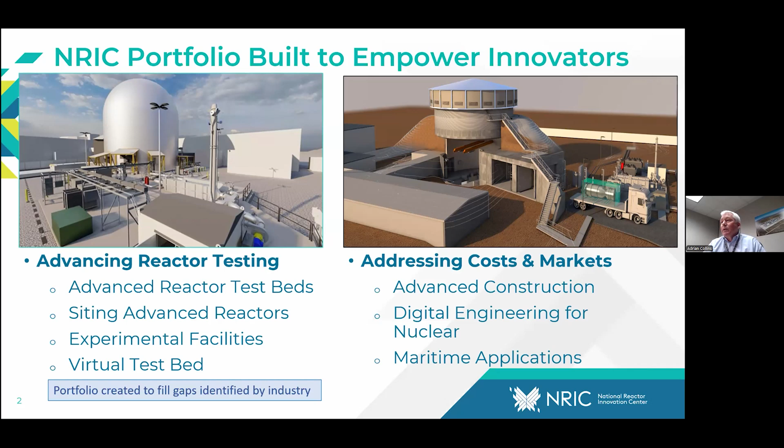In that theme, the number one highest priority activity that we have in NRIC today is the build out of what we call the NRIC Dome test bed. Dome stands for Demonstration of Microreactor Experiments, and it just happens to be the old Experimental Breeder Reactor 2 dome itself. For those aware of EBR2, it operated from the late 60s to mid 90s, about 94, so about 30 years give or take, and then it was put on standby and later D&D'd.

The dome facility itself was actually slated to come down at one point, but Idaho National Lab worked with the Department of Energy, and we ended up preserving the dome, maybe as a historical monument. At that time we didn't necessarily see NRIC and these advanced developers coming, but that's where we ended up, and it's been fantastic to refurbish that dome and reestablish it as a test bed. It doesn't run its own reactor inside anymore, but it'll hopefully be running a number of these microreactors as we go forward.

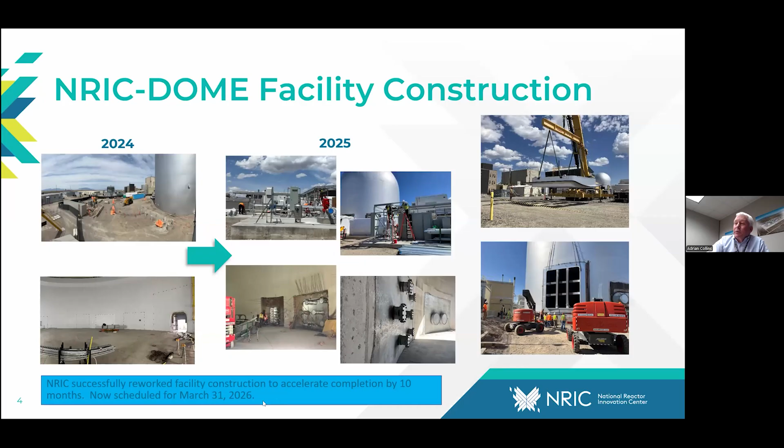We're on schedule. Things are looking just fantastic. Again, it says right here now scheduled March 31st of 2026, so we're just months away.

But when we think about the dome and testing in there, it's not just, hey, here's a facility, bring your reactor in and you can operate it and then go away. It's more of what we call an ecosystem, because there's really a front end and a back end of that, and it's very extensive.

We look at TRISO fuel manufacturing. That's what's coming into the dome. The fuel can get shipped in. We've set up storage here on the INL, not right next to the dome, but on another facility in close proximity, where fuel can come in. It can be stored prior to actually getting loaded in the reactor. Now, some developers may have that exact pathway, others may have a different pathway. So we're trying to anticipate and work with what we know to make sure those pathways exist so they can be successful.

So, for example, Radiant is the one that's actually scheduled to start coming into the dome, starting in April of this year. They'll come into the dome and operate notionally for about a year, start to finish. We're providing shielding—modular shielding that can be set up around a reactor test in there, depending on the requirements. Some developers will need that, some will not, but we'll have shielding that can go around their experiment.

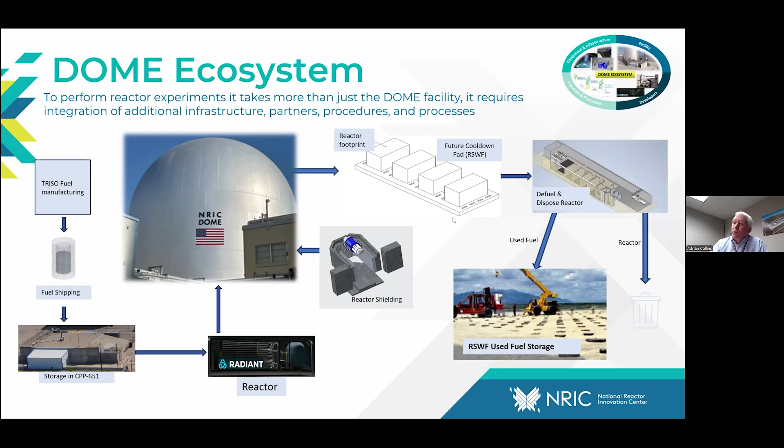I mentioned Radiant was scheduled to come into the dome. We actually went through a scheduling process last summer where we solicited from all the developers that wanted to come into the dome an application to come in, and we went through those and laid out a schedule of how the dome will be utilized. Radiant, in this case with their Kaleidos demonstration unit, is the first one scheduled to come in.

Some key dates around that: the NSDA, PDSA, DSA—these are nuke safety documents they're in the process of completing. Their KDU is scheduled right now to arrive middle of April, fuel it by the end of May, and do a criticality on that by June 18th. Again, that coincides with what many of us think about as the July 4th criticality dates that the president put in place. So that's kind of the overall schedule.

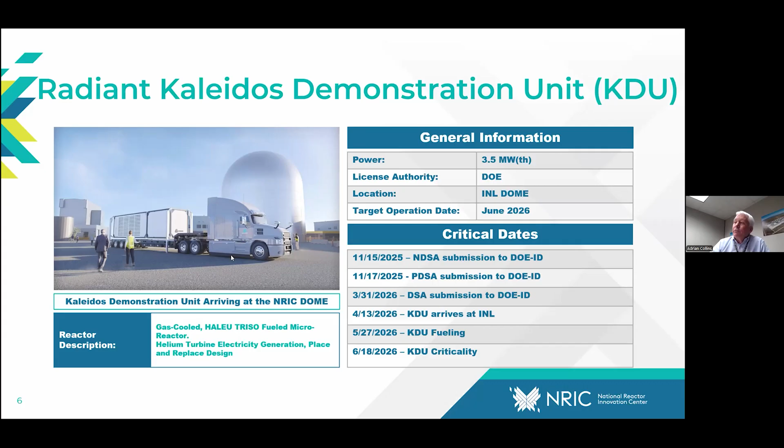And again, just kind of a rendering, but the rendering's probably not too far off of what things will look like when they start arriving.

Another one of our test beds is what we call the Laboratory for Operations and Testing in the U.S., or LOTUS.

This is actually kind of in a transition, so I hesitate to talk too deeply on where this is going, but I think it's of interest too. The LOTUS facility is essentially reestablishing capabilities within what was the old zero power physics reactor. It's in the same fenced site area as the dome, and goes back to Argonne National Laboratory days when they operated the zero power physics reactor, which has been shut down since the 90s. So we're going in and reestablishing that as another place reactor developers can come into.

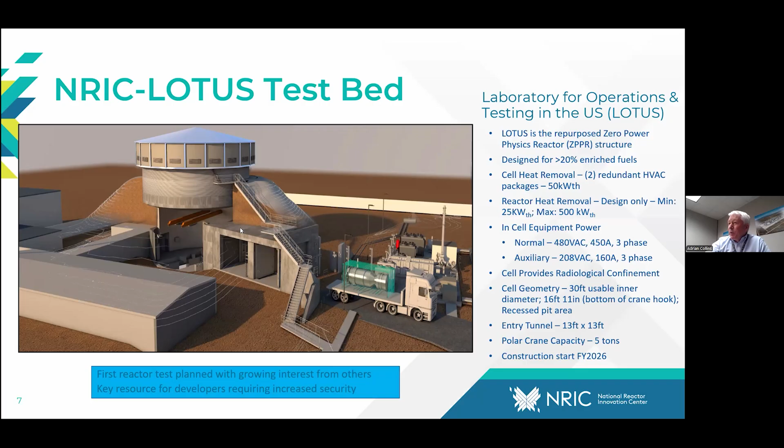So this is a rendering, again, a pretty good one. It's very close.

The LOTUS, though, is a line item construction project from Congress, and we actually went out on a construction bid for that. We moved through the critical decision process of DOE Order 413.3B, and the plan was to award a construction contract last November of 2025, with about a two-year construction period to build this out. When we got the construction bids, along with some other things, the cost increased from what was originally envisioned. We're currently working with the Department of Energy to look at an alternative: rather than reestablish this in the old Zipper facility, establish LOTUS as a new facility, which we believe we can do significantly less expensively than trying to put it into Zipper.

So we're right in the middle of that. I don't really have anything to share other than a heads up that this LOTUS, as we thought about it in Zipper, will probably move towards a new facility right next door, adjacent to it.

The first kind of experiment that wants to come in there is Southern Company, along with their partners TerraPower, Core Power, and EPRI, on the molten chloride reactor experiment. So that's what we're engaged with and aligned on to get LOTUS up and running so they can bring in that experiment and test it.

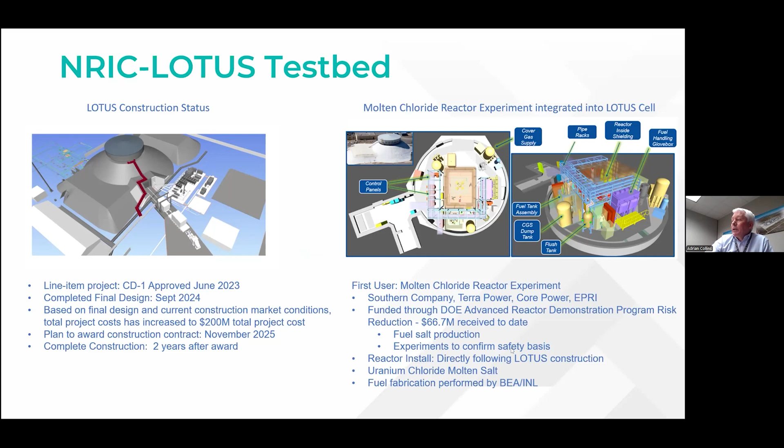Other things we do, moving away from test beds, is having some experimental infrastructure that we put in place to support developers and their R&D needs. The Helium Component Test Facility was completed in 2022. We've established some creep frames just recently, last year, in the sample preparation laboratory, another facility very close to the dome. And METL, the Mechanisms Engineering Test Lab.

This is an area where we're partnered with Argonne National Lab in Chicago, and they do sodium component testing in METL. But it's NRIC infrastructure and supported at Argonne. And then MSTEC, the Molten Salt Thermophysical Examination Capabilities - this is all molten salt testing.

This is a picture, a little old too. If I took a picture today, right above these windows there are eight manipulators - you can actually see the holes here where they would go. So this is a shielded cell with manipulators, and on the back of this is a glove box, depending on what they're working on. So this is all for molten salt experiments.

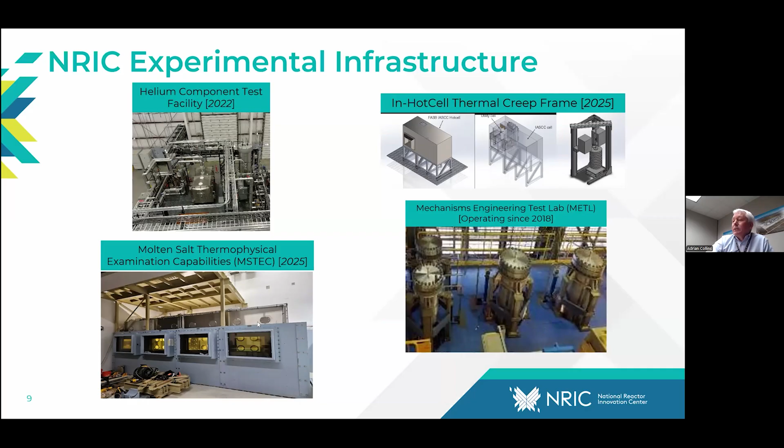Virtual test bed - I mentioned earlier that one of the other things we have is a virtual test bed, where people can come and do modeling and simulation. Maybe it's industry, maybe it's universities, et cetera. This exists - there's models in there, there's a library of information, and we get a lot of use on the VTB side of things. The thought there is how do we accelerate licensing, the DOE authorization process, and mature design before we actually start to build. So that's a virtual test bed.

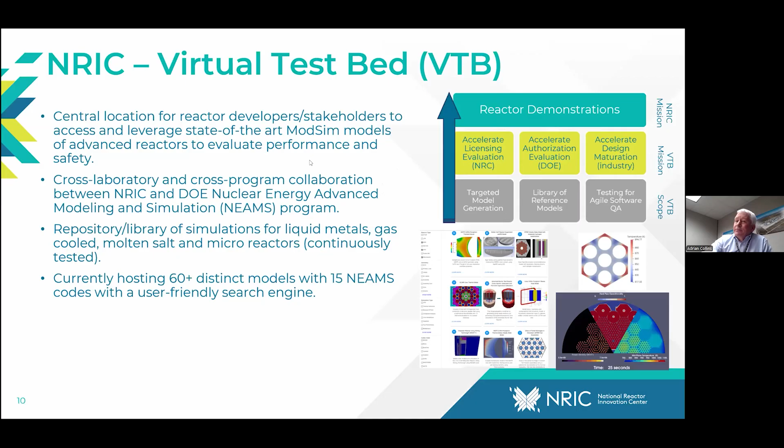Addressing costs and markets, and how do we engage there? The first thing is advanced construction technology. We actually partnered with GE Vernova on this, and the objective was to reduce costs and schedule time.

One of the things we took on very early was to come up with the diaphragm plate steel composite, which replaces forms and rebar and all the labor that goes into that. So what we did is prove out a principle where these get fabricated - this DPSC gets fabricated, brought on site, welded together, concrete gets poured within it, and it stays in place. So huge labor cost savings. We worked on that through last year, into the start of fiscal year 25 and calendar year 24, doing the testing to prove out that principle.

And it was successful, right? So when we look at some of the samples, the testing was done at Purdue.

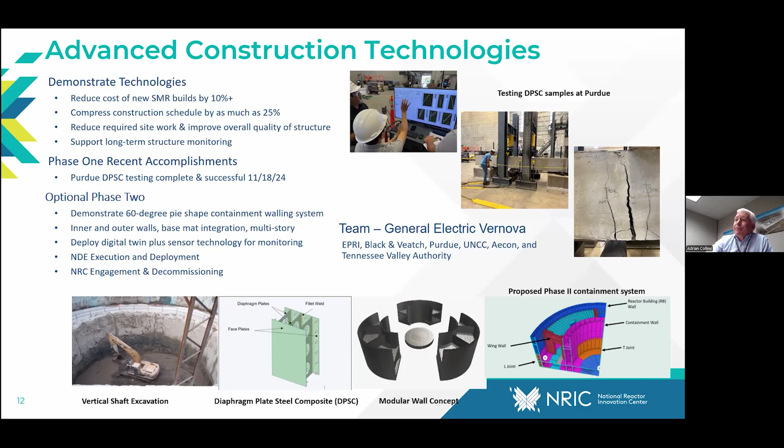Another area we went after was nuclear quality assurance challenges. A lot of costs and things were driven by NQA and NQA1. So we kicked this off with kind of a workshop that we held just over a year ago now, December of '24 in DC. And you can see a wide range of people attended this.

It was vastly attended, from developers, EPCs, suppliers, code committees, NRC, DOE, EPRI, NEI attended this, and really looking at kind of a workshop brainstorming of some areas to go after and what we could do to make sure that we were appropriately applying NQA1.

So next steps on that, we're looking at a number of things. How do we review, optimize, and modernize the requirements? Use risk-informed, performance-based approaches, integrate commercial grade dedication.

And we're doing that within like NRIC 2 and some of our construction projects, right? Where we don't necessarily have to spec NQA1, but we spec the components, bring them in, and then do a commercial grade dedication on them rather than that, and it kind of opens up our world of suppliers that we can go out to.

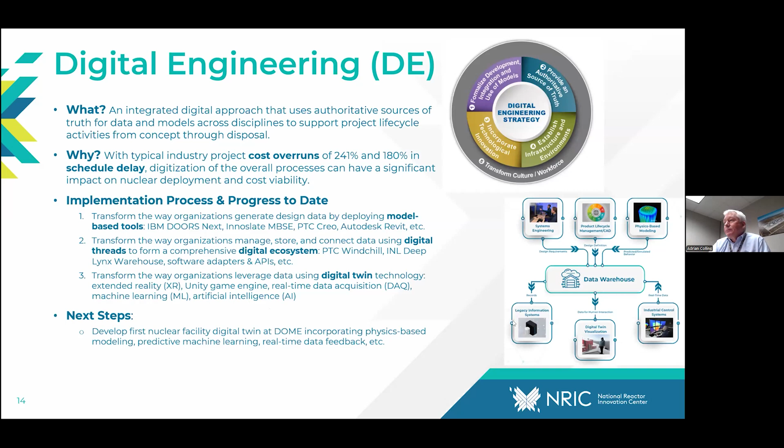And then integrating AI into the process. So a lot of time and effort into whether it's going through the DOE authorization basis or the NRC, and how AI, as it's impacting everything in our lives, can also help us in this and being more cost effective. So we're working that.

We actually put a pilot in place here just last fall, where we created a set of inputs for a high temperature gas reactor, and then had AI generate one of the safety basis documents, one of the chapters for that. And then, of course, just like all AI tools, people have to go back and review them and make sure the output's good. So we had a lot of success with that.

One of the challenges we ran into was the firewall between the government cloud and the AI tool itself, so we're working through some of that. We think in the end it's not unreasonable to anticipate we could have a 30 to 50% decrease in time to develop and review safety documents, accelerating the entire authorization process and the deployment of some of these test beds, with future application to the Nuclear Regulatory Commission too, and their reviews.

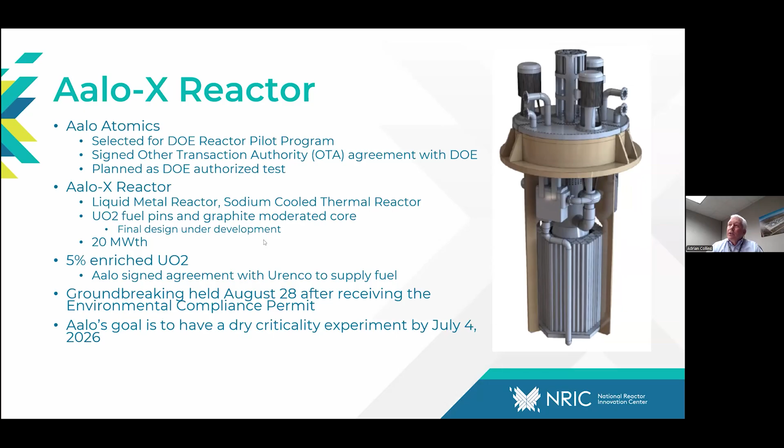So that's Aalo. The pilot program in general - most people are probably aware of that - is the Department of Energy reactor pilot program. 10 companies were awarded under that pilot program; Oklo had 2 different awards, so there's 11 total. All of those companies are going through a DOE authorization process, which is one of the things the pilot program enabled. We're engaged heavily with some, but at least somewhat with all of them at this point - there may be a few we're still finalizing contracting with, but we engage heavily. And of course, the DOE's other pilot program was the fuel line program.

That's what I have for the slides, but I'm happy to take any questions and answer what I can.

I found I have this set up for my headset, so it doesn't work if I don't have my headset on.

Thank you for that presentation. I encourage the crowd to drop questions into the chat if they have some, but I'll go ahead and kick us off with a couple questions. Just getting into the weeds a little bit, could you talk about the distinction between DOE authorized reactors and NRC licensed reactors? That's not always clear. How does the safety and oversight work for projects that go through NRIC? Can you share that?

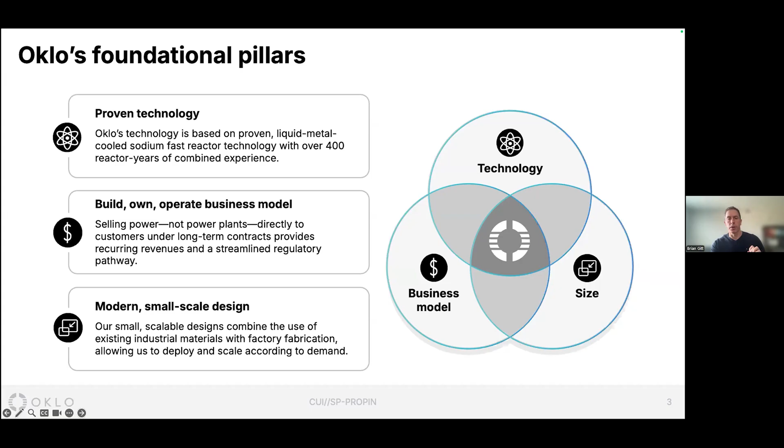As I alluded to, we started in 2013. We are relatively still a small company, only approximately 250 employees, although we are growing incredibly fast. If you go to our website and have relevant skills, we'd encourage you to apply—we have close to 100 open job positions right now. We're hiring very fast as we move into this execution phase.

The company went public in 2024. We originally raised just over $300 million and have since had follow-on additional equity raises of—this is even now out of date—multiple billions of dollars. So we are in a very strong financial position as we move into this execution phase to implement the vision that Jake and Caroline, the founders, started in 2013.

A few things we're going to talk about today—I've hit on a few of these, but I want to comprehensively highlight the rest. We're going to talk about technology and size, as I alluded to, and the benefits of leveraging this legacy technology. We'll drill into the business model a little more, and most importantly, talk about how technology, size, and the business model actually influence the economics.

What are the unit economics of how you build and operate these plants? And how do these decisions around technology, business model, and size impact what customers we can offer this to? Historically, utilities were really the only customer, whereas now we're talking about military bases like Eielson Air Force Base, data center customers, industrial sites, and smaller utilities. There's a whole new cohort of diverse customers that, because of these technology, size, and business model decisions, we're able to open up this solution for.

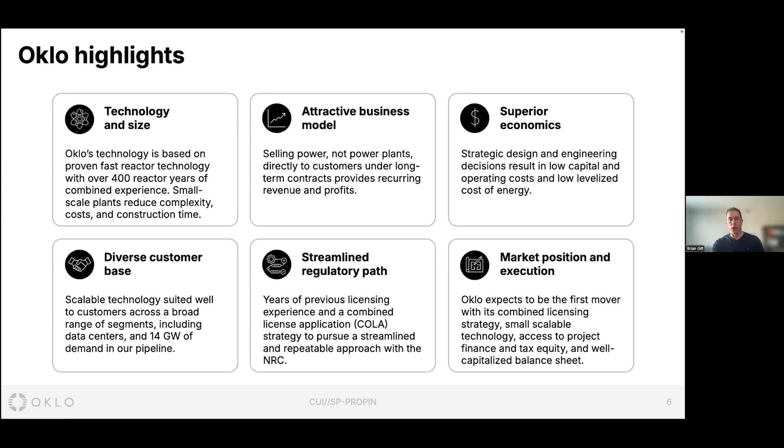So what we're actually delivering is just a small power plant. We're talking about something that can be constructed in about 18 months, or 1.5 years. We're talking about a size, in the Eielson case, of 5 megawatts electric plus the thermal steam we'll be providing, all the way up to about 75 megawatts electric. That range is the product we're offering the market right now, which is a very distinct and different product, as I alluded to earlier.

These power plants each sit on a very, very small footprint—we're talking about something as small as 4 acres. Now, this does not include a substation, parking lots, and all of that.

I'm just talking about the footprint of the power plant - the nuclear island, the balance of plant, the air-cooled condensers, and the core infrastructure required. Think of this as Lego blocks. A lot of our data center customers are looking at 500 megawatts, 1,000 megawatts, or even more. You just put these in Lego-like fashion on a site, allowing incremental build-out, because each power plant is its own independent system. There's no dependency on shared cooling water or anything like that amongst these power plants.

The design life is approximately 40 years, and we're also getting a license for our plants for 40 years. However, these licenses can get extended, just as many large plants are now going for NRC, Nuclear Regulatory Commission extensions. We can as well, and you can update, refurbish, and replace different components of the plant so it can go longer. So I just wanted to level-set: what we call a powerhouse, or Aurora powerhouse, is just a small power plant that is independent in nature and can be scaled in Lego-like fashion on a site.

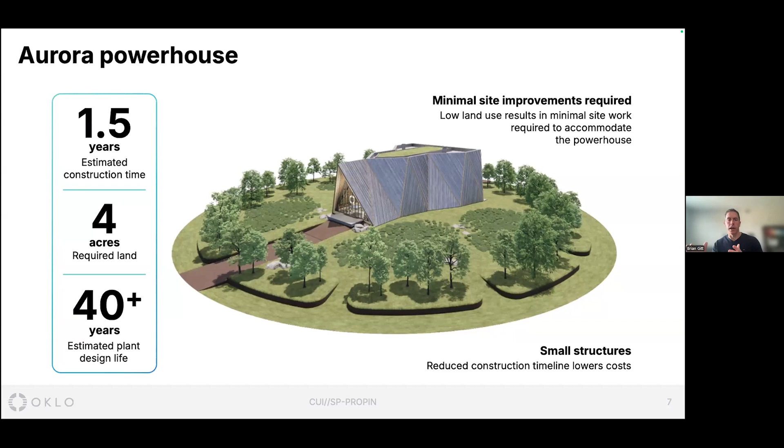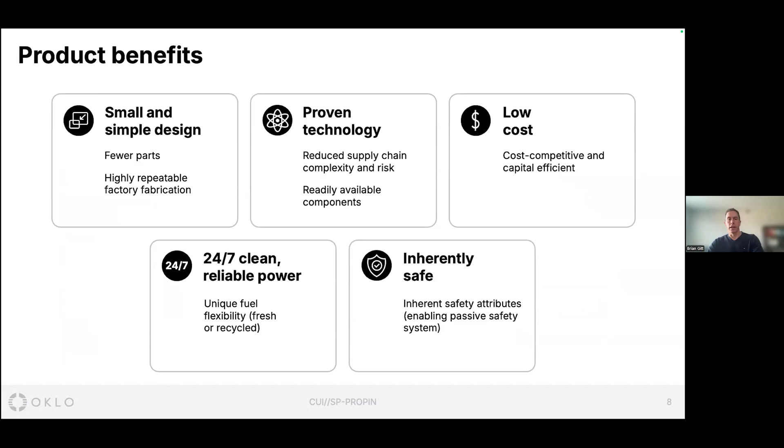The product benefits of this - we hit on the simple and small design. Simplicity, we all know this is just common sense, but the more simplistic a design, the more cost effective it's going to be. Anytime you add a lot of complexity and detailed engineered systems with layers and layers of redundancy, you're going to inflate costs. Having a really elegant design that's simplistic, with fewer moving parts and fewer things to go wrong, is a huge advantage from a cost standpoint and a maintenance and operation standpoint.

We wanted to select proven technology. A metal-cooled fast reactor was developed in the early 1950s. As I mentioned before, there's over 400 reactor-years of operational history running these around the world. About 25 of them have been constructed, and there's some in operation today in Russia and in China, and soon to be in the US as we start commercializing and deploying these.

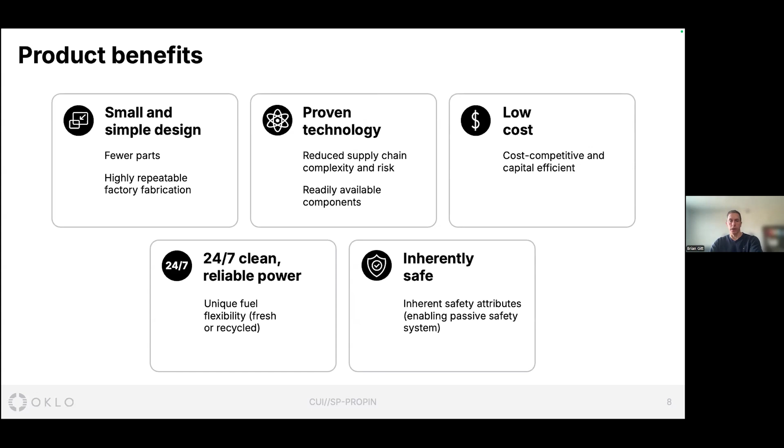Cost is really essential, and we're going to talk a lot about how we get to economies of scale through volume versus size. Looking for cost engineering opportunities to stay competitive is incredibly important. Ultimately, providing this 24/7 clean baseload product - as we talk about other energy sources that are more intermittent or less reliable, this is really solving for that problem, which in a military base like Eielson is essential: reliable, resilient, and affordable baseload power. And we have to have the safety - all of these inherent safety characteristics that we're going to talk about are really, really key. So all of these are the inherent benefits.

So when we're talking about Oklo's powerhouse, a lot of people think about the reactor. Now, the reactor is just one component of the power plant. It's an important component, but at the end of the day, all it is a heat source - it's just a fancy way to boil water and create steam, although a very important part of the system.

When we're talking about Oklo's fast fission reactors, imagine just a large stainless steel tank - non-pressurized tanks. These are not forged, this is rolled steel, 304 stainless steel, very similar to tanks made in petrochemical and pharmaceutical industries. There's nothing exotic, basically existing supply chain, non-exotic materials. That's really important - as I mentioned, we can build a range of sizes, in the Eielson case from 5 megawatts all the way up to 75 megawatts. The size of the vessel can change, but ultimately we're trying to standardize as much as possible.

You can ramp power up and down based on other factors like the flow rate of the coolant and how much heat you're pulling off of this, so there's a range of power output that's possible. We operate at atmospheric pressure, so these are non-pressurized vessels, which helps on a number of factors. Number one, safety - if there were to be any kind of event or problem, you don't have any driving forces because it's a non-pressurized vessel.

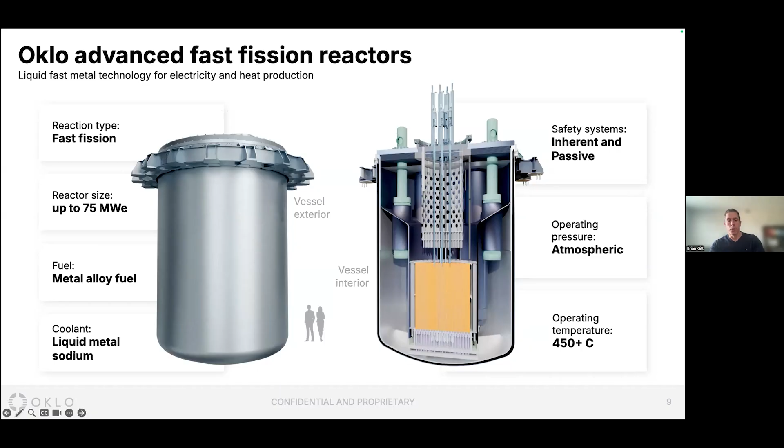Again, it's about simplicity in the design, fewer things that could potentially go wrong if it's at atmospheric pressure. We operate at 450 degrees C, which gives high thermal efficiency compared to traditional light water reactor units that operate at lower temperatures. So those are some characteristics of the reactor itself.

But the reactor is just a part of a more comprehensive system. It isn't overly complex. We have the reactor vessel, which is the heat source where nuclear fission happens. That whole reactor vessel is full of liquid metal. Imagine a big stainless steel tank, with fuel at the bottom, and the whole tank full of liquid metal. As that fuel heats up from fission, it transfers heat to the liquid metal, which we pump up through heat exchangers. At the end of the day, it's like a big fancy tea kettle.

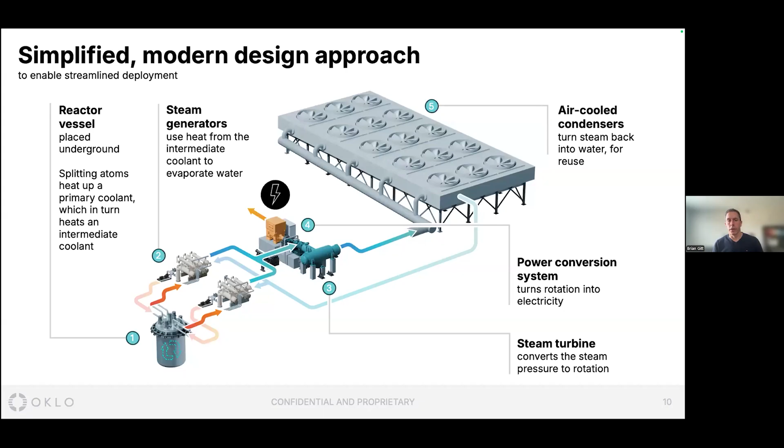You're just trying to boil water to create steam. So you have a series of heat exchangers that transfer heat from the liquid metal to water, boiling it to create steam, which ultimately turns a turbine. At the end of that, you have heat you need to condense back, so we use air-cooled condensers. This is really important because we don't need to be near water—no ocean, lake, or reservoir—so it opens up siting possibilities tremendously, using an air-cooled mechanism to deal with that decay and excess heat out of the system. Those are the basic components of Oklo's design.

One of the other benefits of smaller reactor sizes is it's much easier to reach the level of reliability and resilience required by a military base, a data center, or even a small utility. Imagine a large 1,000 megawatt reactor—those get refueled every 18 to 24 months. What happens when you take it down for refueling? Where do you replace all that power? With a much smaller unit, it's easier to get redundancy and backup, so in certain applications you can have multiple powerhouses on-site. Anytime you're taking one down for refueling or maintenance, you have spare capacity to fill the gap. That enables us to reach greater than 99% reliability, which is often required by defense and data center applications.

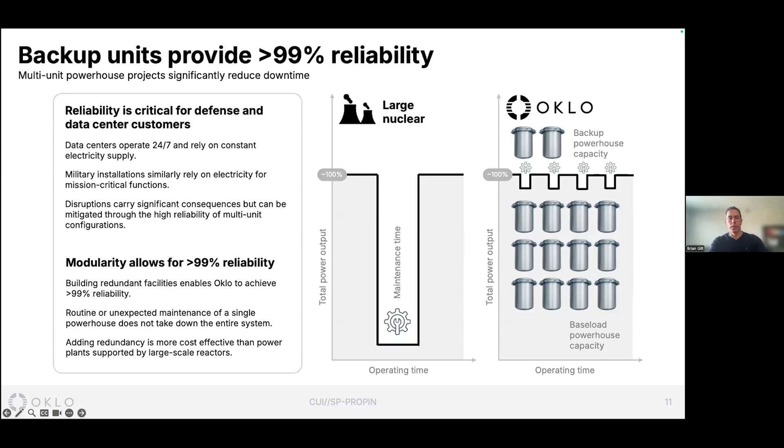When we talk about nuclear energy, it's really the cleanest and most environmentally superior form of energy we know how to make as humans. It beats out wind and solar on land use and materials intensity, and it even beats wind and solar on greenhouse gas emissions. When we think about environmental impact, the most important things to keep in mind are land, water, and waste. Across these dimensions, nuclear is superior because it has the smallest materials intensity—it uses the smallest amount of land, the smallest amount of materials, and therefore creates the smallest amount of waste.

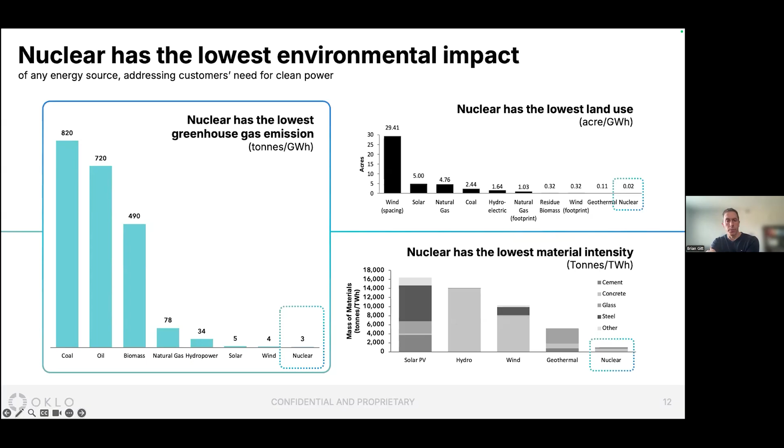And we'll talk more about the waste and any objections to that in a few minutes. But from an environmental lens, it's certainly the most superior way to generate energy that we've figured out so far.

Let's dig into regulatory. Oklo has been formally engaged with the Nuclear Regulatory Commission since 2016, and we've been putting in lots of iterative reps and negotiations with them over all this time. And finally, the light is at the end of the tunnel.

We are very confident based upon, at this point, over 600 technical and planning meetings. This is basically our engineers sitting down with their engineers and hashing out all of these negotiated details around workforce, operator requirements, security, environmental review, and all of these different aspects. And we've submitted nearly 60 topical reports, which are basically white papers on each of these different topics.

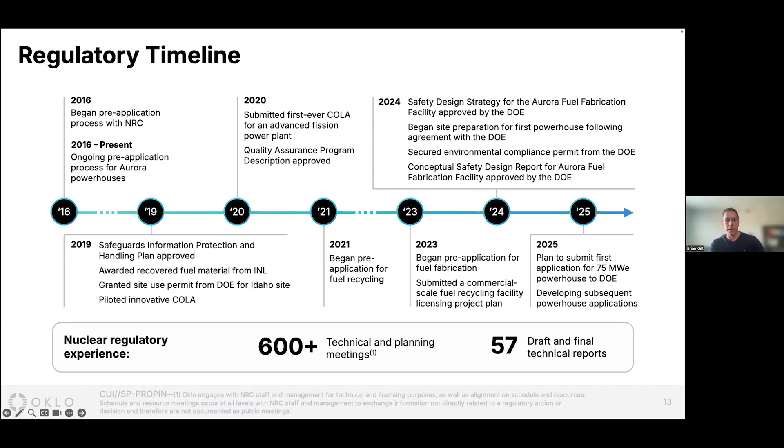So we've made tremendous headway and traction in this arena, and we're incredibly well positioned and confident of navigating this and having a scalable path forward.

So much so that we've already started to break ground in construction on our first plant in Idaho. In September, we broke ground, and as of right now, Kiewit, who is the lead constructor on that project, is basically blasting basalt. There's a bunch of basalt rock that needs to be removed from where we're going to place the power plant, so we can bore down for where the reactor vessel is going to sit. That is happening as we speak. Right now, Kiewit is on site, blasting, doing site prep, and getting that construction process going. So there's a lot of activity and headway on that.

And all of this leads into: even if you can get the thing licensed and you can start building it, if you don't have a fuel supply strategy, you can't turn that on. To be quite frank, that has been the number one gating factor for advanced nuclear and SMRs in general, is having access to fuel supply.

Oklo has a three-pronged strategy on this. First is government supplied fuel. The US government is sitting on very large stockpiles of material, as evidenced by our first plant that we're building in Idaho, which is leveraging the same fuel that was in EBR2, that experimental breeder reactor 2 that ran from 1964 to 1994. We are taking that fuel and recycling it for use in this first powerhouse that we're deploying.

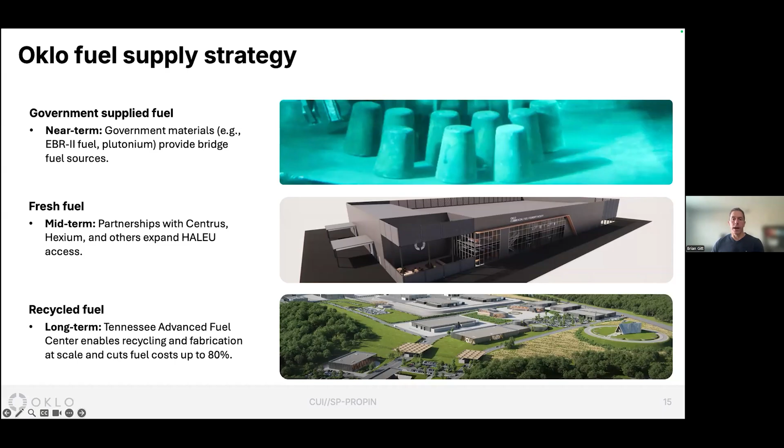So this gives us three options for fuel sources. The government fuel is going to enable the bridge, right? That's going to enable us to scale faster, because that material all it has to be is down blended. You don't have to do this very complicated manufacturing process, you're just down blending it and mixing it with uranium, fabricating it into fuel, and you can load it into our advanced reactors. Fresh fuel is incredibly important because we've got to stand up the supply chain, and then the longer term strategy is recycled fuel. So all of that is underway and will meet different short, mid, and long-term needs.

As I mentioned earlier, the business model is really, really important, especially as we talk about smaller utilities or military bases or data centers, because they are not going to want to come up with the upfront capital. So selling power, not power plants, is really foundational to coming up with a very fast to market approach that meets customers where they're at and solves the problem we can actually solve for them. And we're doing that through long-term power purchase agreements.

I'll talk about the Eielson project in a second, but typically those agreements are 20 years. So the customer is basically saying, hey, we're going to buy X amount of power over a 20-year period of time at this cost and agreed upon price. And that is kind of how we're commercially constructing it.

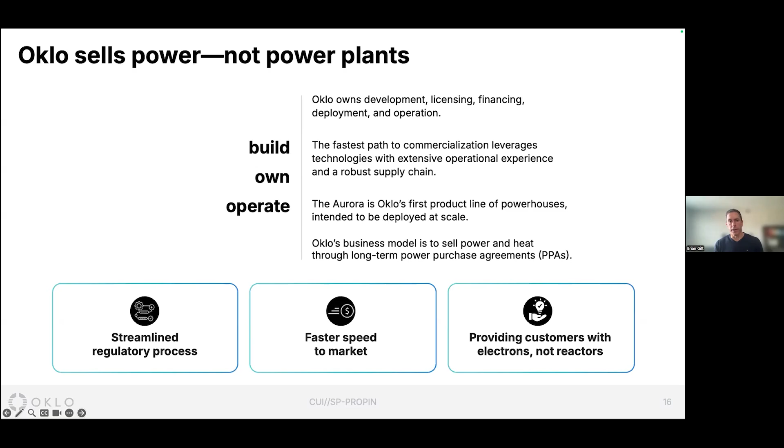Then we take that agreement and we go to the capital markets and we finance against that to get the power plant built, through a combination of debt and equity. And we're able to leverage investment tax credits from the federal government — in some cases, up to 50% of the cost can come back in an investment tax credit. We're also working with the Energy Dominance Financing Program of DOE, which would enable us to access low cost of capital in terms of the financing rate. And all of this gets into our ability to sell affordable, low-cost power.

I mentioned the vertical integration of what Oklo is doing versus traditional approaches, and I think this slide illustrates that well. Whereas in the past, a reactor designer would just license their design to a utility, and then the utility would go and build and operate and get a license to operate that plant, by vertically integrating, we can streamline this process.

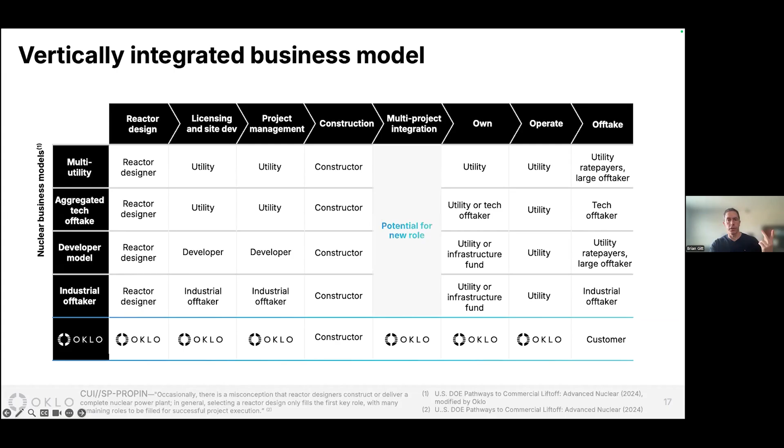We still are working with constructors, so we're working with Kiewit in Idaho and Haskell in Alaska for the Eielson project. But ultimately, we're taking over many of the roles that the utility traditionally had done. This really enables us to streamline our approach for a regulatory process — we can go through in one step versus historically that has been two steps — and just have a much more efficient process going forward.

We've built a very large pipeline of opportunities, both working with the Department of Defense as well as Meta and Switch and other data center operators. We don't need to talk much about this today, but this pipeline is almost growing by the week, and it's just incredible the amount of demand that there is for this product right now.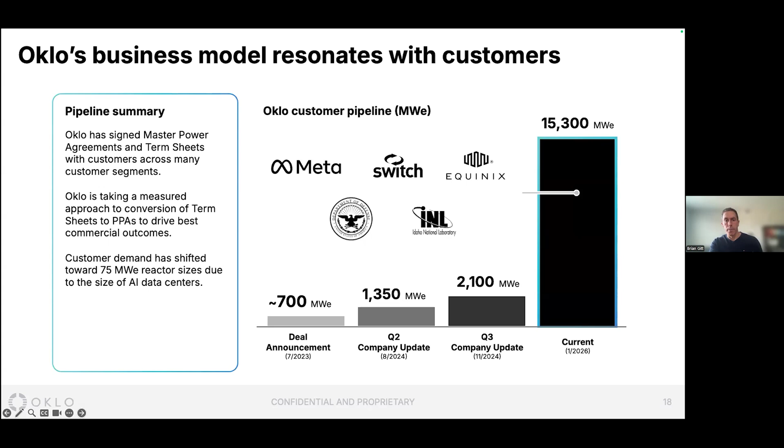So let's talk about an update on Eielson and what it is and where we're at in the project. First and foremost, the whole purpose, the mission of this, is to provide a very resilient on-site energy solution for Eielson Air Force Base. The base cannot fulfill its mission unless it has reliable, affordable, resilient energy, so energy security and having this long duration islanded operation option is really critical to fulfill that mission.

So our scope for this is all full stack: design, license, finance, construct, own, operate, maintain, and ultimately at the end of life, decommission. All of that is within Oklo's scope for the project.

This project, the way it's currently scoped, is a small amount of electric power, 5 megawatt electric base load. There's also a thermal component for district heating for the base, the 400 to 500,000 pounds per hour of steam that would help with that use case.

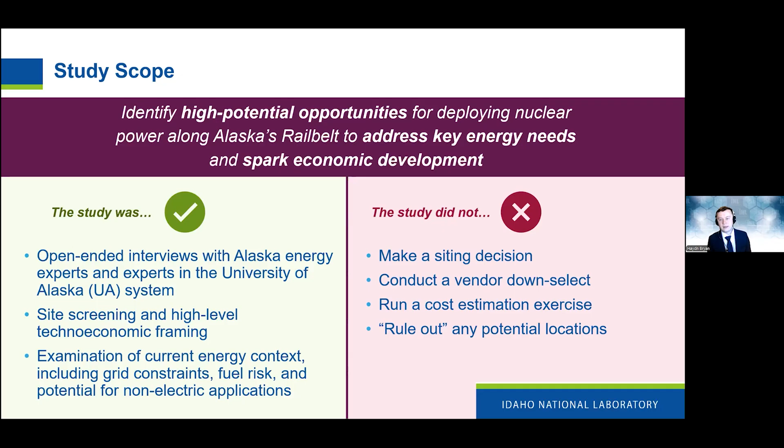What we did, though, is what you see at the top here: identify high potential opportunities, specific locations that stood out as likely first adopters for advanced nuclear technologies in the Railbelt that would help address key energy needs and spark economic development in the region.

So first off, the high-level findings that we applied to these high potential opportunity sites, based directly off of the interviews that we conducted. The region faces transmission challenges and generation backup constraints.

The rail belt can be best thought of as an interconnected network of microgrids, and there are limited backup generation within the region. So any amount of stable, reliable baseload generation is worth its weight in gold in the area.

That's doubled by the looming natural gas insecurity in the Cook Inlet. The cost of recovering natural gas from the Cook Inlet is increasing as the resources in the inlet decrease, and there have been challenges with suppliers moving out or potentially not continuing their contracts in the region.

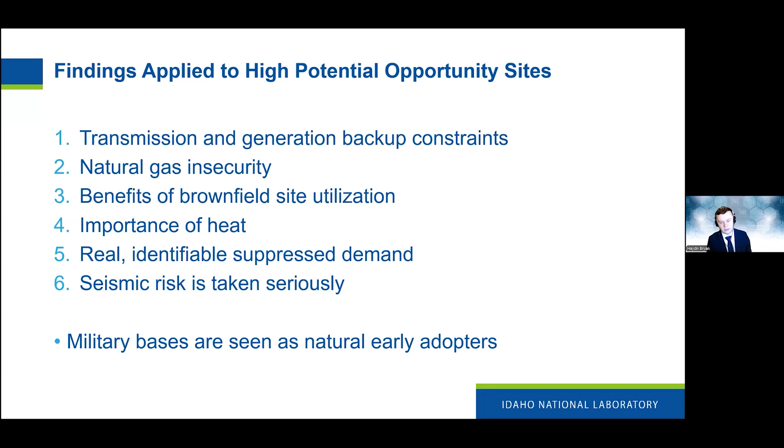Finally, since we were looking at commercial applications of nuclear, not military, there are military bases like Eielson that are seen as natural early adopters. They already have staff members, an extreme reliability need, and they don't like having a constant need for refueling. So they're a very natural early adopter for nuclear, and as discussed previously, they're already looking at doing so.

Again, kind of preaching to the choir here - these are things that are already known, but there are transmission and generation constraints in the rail belt. There's a $400 million project with $200 million of cost share from DOE aiming to increase transmission from about 80 megawatts constraint to 250 megawatts. And any new generation capacity added creates momentum for new transmission infrastructure.

A little bit more on the natural gas shortages. Railbelt utilities remain dependent on natural gas extracted from the increasingly marginal and cost-intensive reservoirs in Cook Inlet. The two main alternatives being discussed to resolve this issue are either import from elsewhere in the region or from other countries, or a pipeline from the North Slope. Both of these are options, but they introduce costs, complexity, regulatory complexity, and significant lead times.

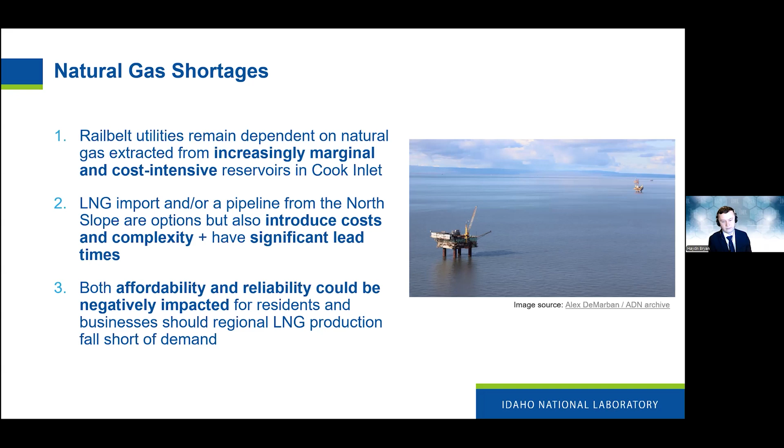The challenges are already looming. Both affordability and reliability could, and perhaps already are, being negatively impacted for both residents and businesses should regional natural gas production fall short of demand.

So now we can move into the alignment of the Railbelt requirements and some of the benefits of advanced nuclear capabilities. Some of these were already covered in previous presentations, and this is kind of what the entire conference is about, so some I can move through quickly, but I think it's an important point for us to touch on.

So the matched capacity between what the Railbelt needs and advanced nuclear. Traditional scale nuclear power plants are in the hundreds of megawatts up to gigawatts, whereas advanced reactors, small modular reactors, microreactors are as few as 1 megawatt up to tens of megawatts, or the small hundreds of megawatts. That's really the size needed by the Railbelt, and the transmission capacity of the Railbelt as well. That also allows you to build your generation capacity incrementally as your load evolves and not take on too much financial risk.

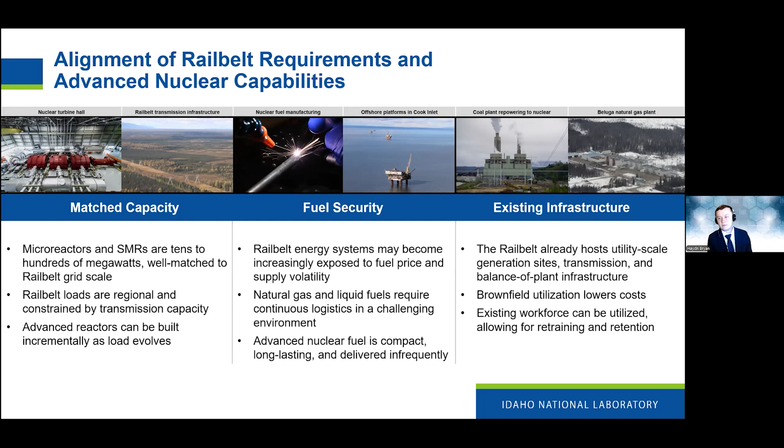The fuel security as well - you're moving away from something with diesel or natural gas that needs a constant supply chain and constant refueling to something that is refueled on the order of years as opposed to constant. Again, as I mentioned, the existing infrastructure, you can potentially reduce your costs by up to 10 to 35% if you utilize existing infrastructure. This picture on the left is the Kemmerer plant in Wyoming, a coal-to-nuclear power transition they're looking at. And on the right, you can see the Beluga natural gas plant, which is actually one of the sites selected in our study.

There's suppressed demand. Mining is a large suppressed demand that ends up showing up. There are energy intensive economic activities that are constrained by energy cost and availability. It represents demand that's operating below its economic potential, not speculative growth.

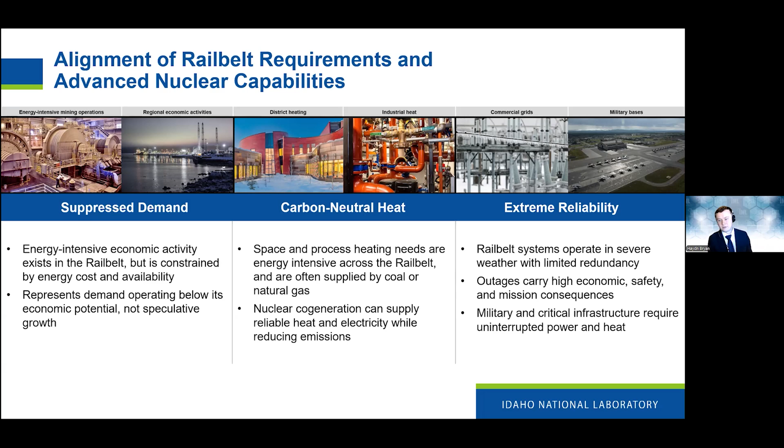This carbon neutral heat, there's district heating in the region, and that could be expanded. Nuclear cogeneration can supply reliable heat and electricity while reducing emissions. Nuclear is a very reliable technology, and that's a very beneficial capability to have in Alaska. This also matches very well with military or critical infrastructure, which require uninterrupted power and heat.

So the study candidate sites, presented in no particular order, came out of our conversations with experts in the area. The Aurora coal power plant, which is 27.5 megawatts electric, has a district heating site that provides heat to around 200 customers. Customers doesn't mean people, that means buildings. And that turns nuclear heat into a primary product, not a byproduct.

And it has very winter peaky load, and also air quality pressure makes coal replacement very politically legible. It's the cleanest example of a brownfield transition as opposed to a pure power swap.

Beluga is a central Railbelt node where firm capacity has system-wide reliability value, and existing generation in the substation context favors drop-in nuclear replacement logic. The construction, given Beluga's location, is going to be a little bit harder than average if that site is considered, but the operational value is unusually high there, given that it's a brownfield site and it's not being used. It's a mothballed site, 281 megawatts potentially there.

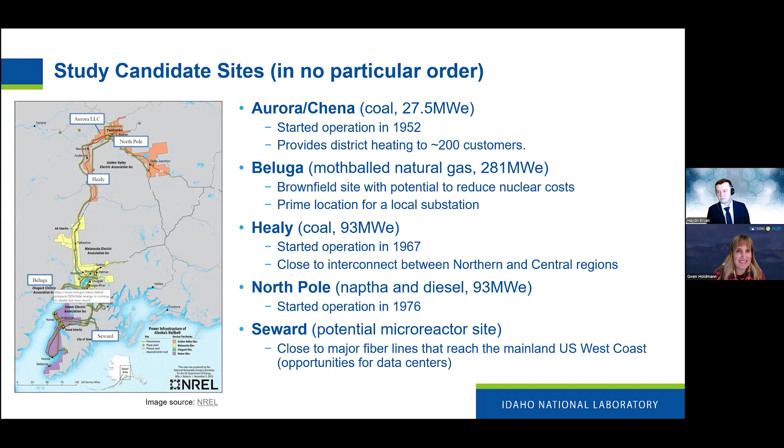Okay, yeah, great, thank you. I have about 10 other questions for you, but I'm going to hold them. I have about 10 other answers.

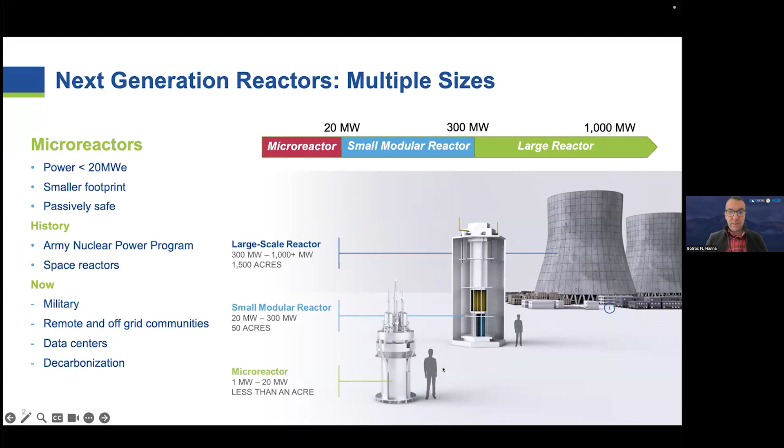Nuclear microreactors are not a new idea. They have been used in the Army nuclear power program and also for space reactors. Right now people are interested again in microreactors, also for military applications, remote communities, microgrids, data centers, and so on. You can see how microreactors look compared to a human, and how this is different from small or larger reactors.

The benefits of microreactors, why they are attractive in general, is because they have a small size and should be easier to transport, especially to remote places and military bases. The design is simple and made to be fail-safe. Also, it can be built and connected relatively fast, within a few years.

So it should be built faster than larger reactors. Also, it is designed to be more and more autonomous. It can be located with the end user, and it's a fast way to learn from real world operational data - you can build the reactor relatively fast and get a lot of operational experience compared to larger reactors. And also, as many people talked about before, it's flexible to site because it can be transported.

The challenges of microreactors: the first one is this economy of scale. So for microreactors in general, the cost per kilowatt or megawatt hour is relatively high compared to larger reactors. The second challenge is fuel availability - many microreactor vendors right now are interested in different fuels compared to those used in large reactors.

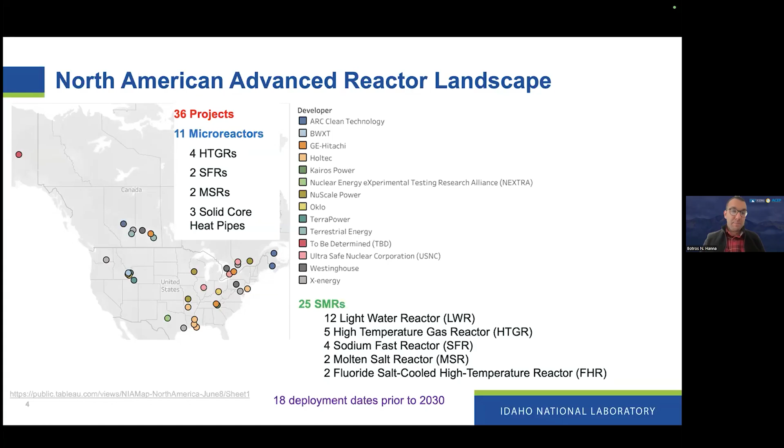Again, just showing there is a lot of excitement about microreactors. You can see there are right now 36 projects of nuclear reactors in North America, 11 of them are microreactors. And when you talk about microreactors, you have all kinds of microreactors and several designs and technologies, and 18 of these projects are expected to be deployed by 2030.

Now I'll focus more on the economics. Just to give an idea what we mean by economy of scale, here I'm showing the overnight cost of a microreactor and the operational and maintenance cost of a microreactor, and you can see how the cost gets really higher for a small reactor.

Just to give an example, if you have a large reactor like 1,000 megawatt, you can reach an overnight cost as low as $6,000 per kilowatt. But if you're talking about a microreactor that's 1 megawatt, this overnight cost can be up to $18,000. Same for the operational and maintenance cost - for large reactors in general it can be as low as $20 per megawatt hour, but for smaller reactors it can be as high as 160, 180 dollars per megawatt hour. Of course these numbers will differ from one design to another.

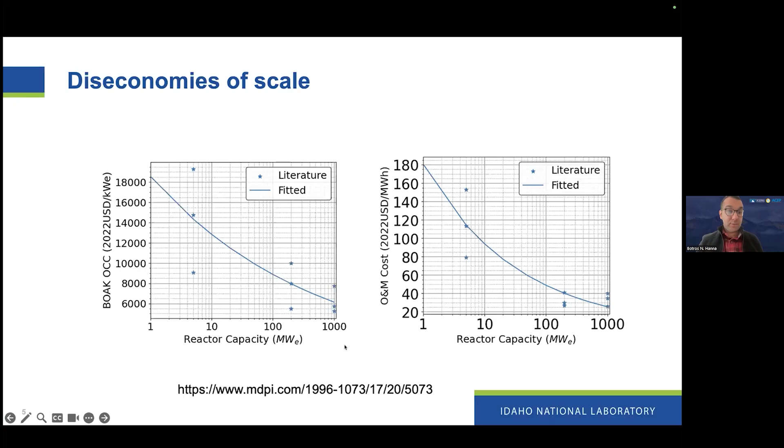This is just a plot showing numbers from different designs in the literature, just to give an idea about the diseconomy of scale.

So, how to estimate the cost of nuclear microreactors? There are already a lot of cost estimates of microreactors around, but we thought it's important to develop a bottom-up cost estimate for microreactors as detailed as possible, looking at designs that the industry is interested in, designs that use TRISO fuel. We also had the opportunity that in INL we have the Marvel project, a microreactor project, and we got some cost data from that project. This helps us come up with a relatively realistic cost estimate of microreactors.

If you are interested in the methodology in detail, how we came up with such a cost estimate for several microreactors, you can scan the QR code for the published report. You can also scan another QR code for a tool for cost estimation. This tool right now is a Python code, so we are working on a web-based app that can be used by more and more users.

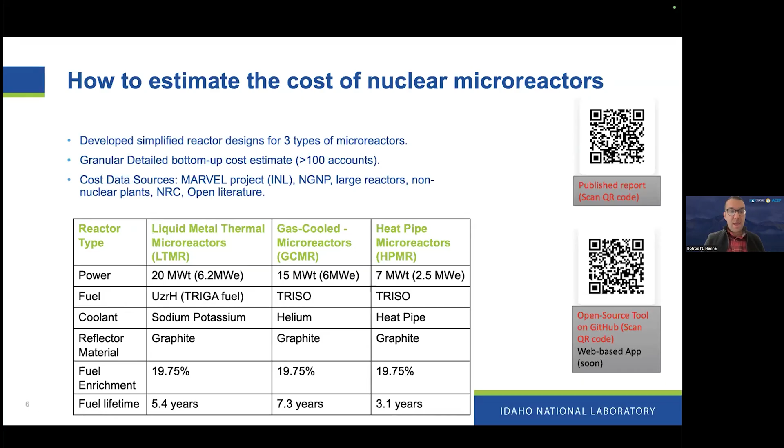The power range here is between 7 megawatt thermal and 20 megawatt thermal. The coolant is sodium potassium for the liquid metal, helium for the gas-cooled reactor, and heat pipe for the heat pipe microreactors. All of them have a relatively high enrichment, almost 20%, and they have several lifetime options for the fuel.

It's important to make some caveats here. The first is that before I show the cost estimate for the reactors, it's important to emphasize that economics are not the only factor in making decisions about using or investing in a specific microreactor. There are several factors that we considered, like capacity factor, safety, operational experience, supply chain, thermal efficiency, and so on. So economics are one factor to consider, not the whole story.

Also, the three designs that we considered here are just examples. There are a lot of variations of design of microreactors, and these designs are pre-conceptual. The reactor designs were not fully optimized, and the cost estimates were developed with incomplete information. So we made some assumptions to come up with these cost estimates, and these numbers should not be used for investment decisions.

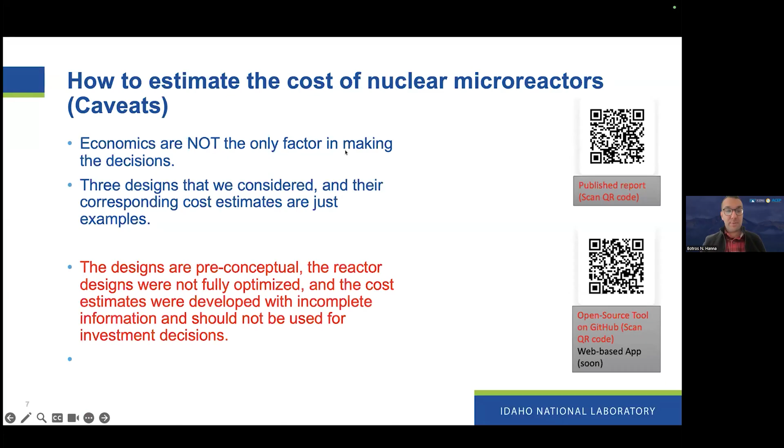All the numbers that I'm showing here are in 2024 USD. The cost includes the cost of pre-construction, something like licensing and plant studies; the direct cost, which includes civil work, reactor systems, fuel, and so on; the indirect cost, which includes engineering and project management, training cost and financial cost; and the operation and maintenance cost. When you look at the three reactors that we considered, you will see that the capital investment cost is not that different.

It's between like 136 and 153 million. But when you look at the capital investment per kilowatt, it's significantly different. It's $25,000 per kilowatt for a liquid metal microreactor, $27,000 per kilowatt for a gas-cooled microreactor, and $54,000 per kilowatt for the heat pipe microreactor.

We added the cost of operation and maintenance, and we ended up with a levelized cost of electricity, the LCOE, of around $330 per megawatt hour for the liquid metal microreactor, higher than this at $400 per megawatt hour for a gas-cooled microreactor, and higher still at over $900 per megawatt hour for a heat pipe microreactor.

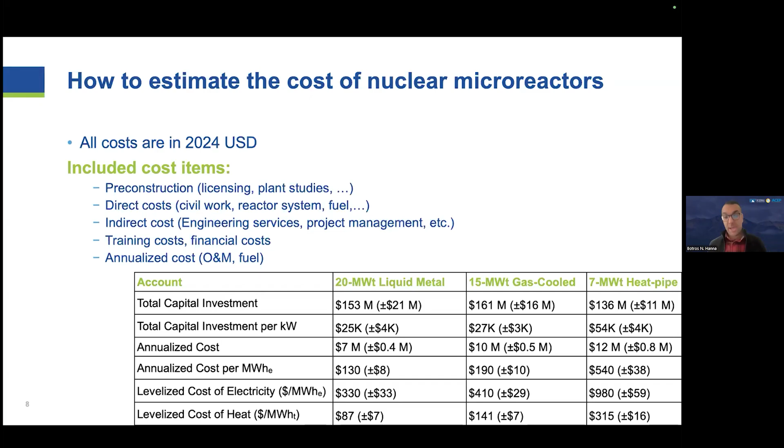So in general, you can see that the liquid metal microreactor has a significantly lower cost than the other two designs. This has to do with the TRISO fuel. The other reactors use TRISO fuel, which has a lot of advantages, but it's relatively expensive. Also, because when you use the TRISO fuel, it has a low fuel density, which means that you need more fuel and a bigger core and bigger reactor. This also makes the cost higher and higher.

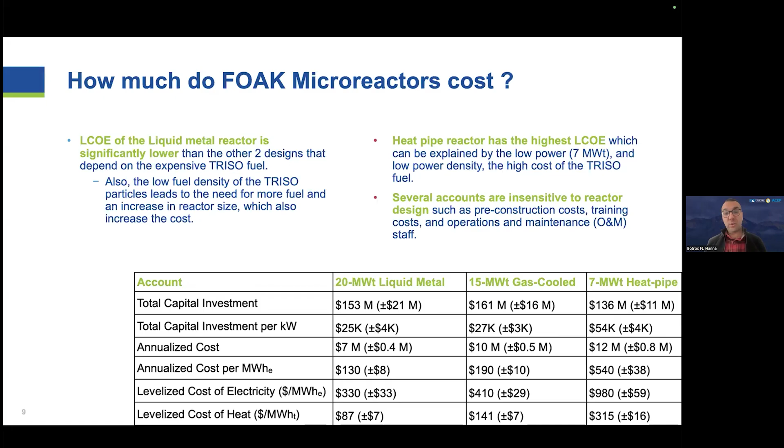A heat pipe microreactor has the highest LCOE in the design that we investigated because it has low power, only 7 megawatts thermal, and it has a low power density, and also because of the high cost of the TRISO fuel. We also found that there are a lot of costs that are not sensitive to reactor design, like the pre-construction cost, the training cost, the staff of operation and maintenance. All of these costs are not sensitive to the reactor design.

Now, how can we reduce this cost from first of a kind to nth of a kind? The key factor here is factory fabrication. This slide shows some work that we did before with Monroe, a manufacturing company, to develop a model for a factory for microreactors. As you can see on the right side, it's a factory with an assembly line with different stations, and the more microreactors it includes, the cheaper the cost will be.

This factory includes around 22 workstations and a final assembly line. The equipment cost was estimated to be 6 million if you are producing 10 reactors per year, and 10 million if you're producing 100 reactors per year. The operating cost would be between 7 and 25 million per year. When you increase the number of reactors the factory is producing per year from 1 to 10, the cost drops by 70%. If you increase it from 10 to 100 reactors per year, the cost drops by 50%.

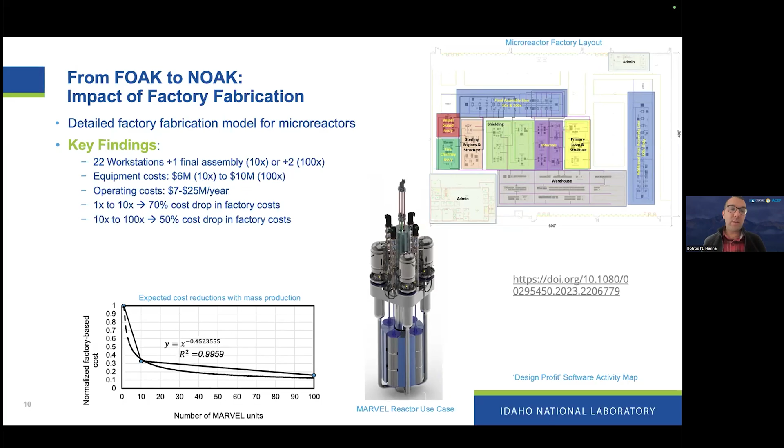And of course, it's important to emphasize here that we're talking only about the components that can be manufactured in a factory. For some activities and some components, they have to be on site. For example, the refueling or the startup - all these kinds of activities will be done on site, so they will not benefit from factory fabrication.

So using some lessons we learned from the factory fabrication, we estimated the nth of a kind cost for several reactors. You can see that when you look at the nth of a kind cost, the cost difference between the three reactor designs we considered is not as significant as it was in the first of a kind cost. For example, the levelized cost of energy for first of a kind liquid metal microreactor is 25% cheaper compared to a gas-cooled microreactor.

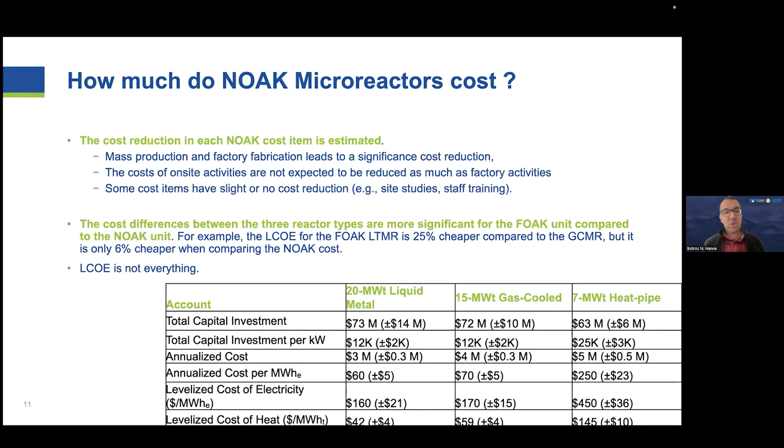But when you consider nth of a kind cost, it's only 6% cheaper. And again, I'm emphasizing here that levelized cost of energy is not everything. You should consider other factors like the supply chain, capacity factor, and other factors as well.

So what are the cost drivers of microreactors? Here I'm showing the cost drivers of liquid metal thermal microreactors. The first one is the capital plant expenditure, which means how much you are spending every year to replace some components of the reactor. Because if you are replacing the reactor vessel or the reflector or the drums every 10 years, 5 years, or something like that, this means you have to get several drums or several reactor vessels over the plant lifetime.

The second factor is the reactor system. Also, the plant licensing is another cost driver. The energy conversion system, which is the turbine, is another cost driver, and of course, the fuel drives the cost as well. Similar cost drivers were found for the other designs, except that the contribution of the fuel becomes higher and higher when using the TRISO fuel.

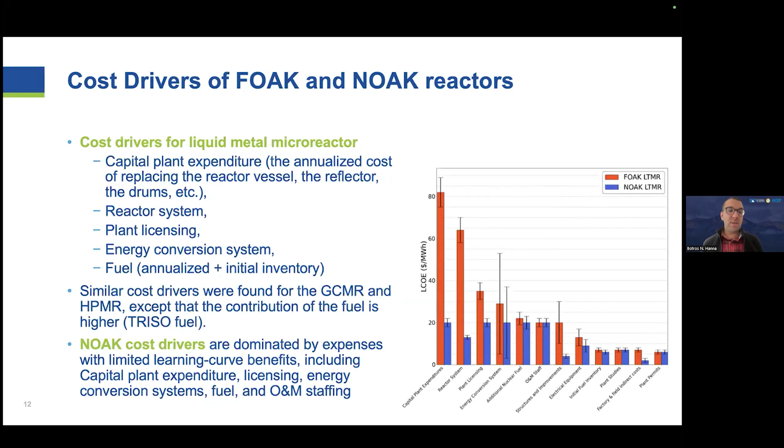Now, to put costs in perspective - are these costs high or low? We need to compare to something else. So in this plot, using publicly available data about wholesale electricity, the annual average electricity prices are between 30 and 60 dollars per megawatt hour. So based on these numbers and our results, microreactors cannot compete with wholesale electricity.

Now for the retail electricity, which is the price that the customer receives, the nuclear microreactors can compete. You can see in this figure that nth of a kind microreactors can compete or penetrate the market in 14 states. We're talking here about behind-the-meter arrangement, where the reactor and the user are co-located.

And of course, microreactors will have a higher and higher chance of penetrating the market when you talk about remote communities, military bases, or mining sites.

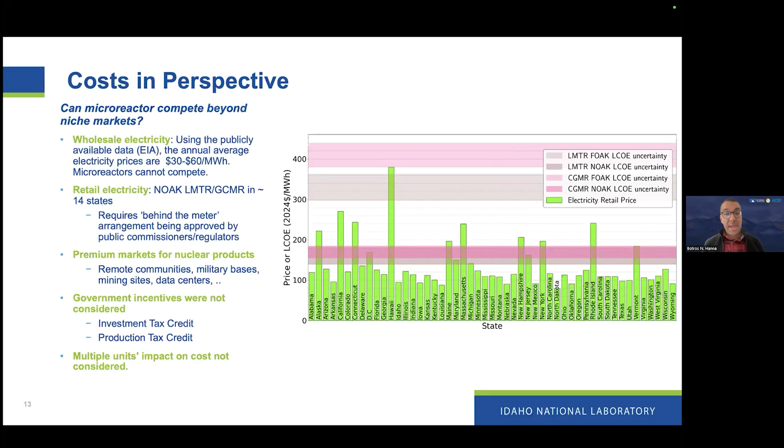It's important to emphasize that this study did not consider government incentives like the investment tax credit and production tax credit. These subsidies and tax credits can effectively reduce the cost. Also, this study did not consider the impact of multiple units. So if you are building several units together, the LCOE will be reduced.

This is another way to look at the cost and how microreactors will penetrate the market more and more when you build more units. So for a first-of-a-kind reactor, it might penetrate the market only in remote communities or maybe in defense applications. But when you build more and more reactors, they can also be useful in specific states that have higher electricity prices, like Alaska.

And according to the results we have so far, it's hard to expect that microreactors will compete with the US grid. That's the end of the presentation, and thank you for your time.

Great, thank you. Thank you, Botros. That was terrific, thank you. And I think we still have Hayden here too. You guys both available for some questions?

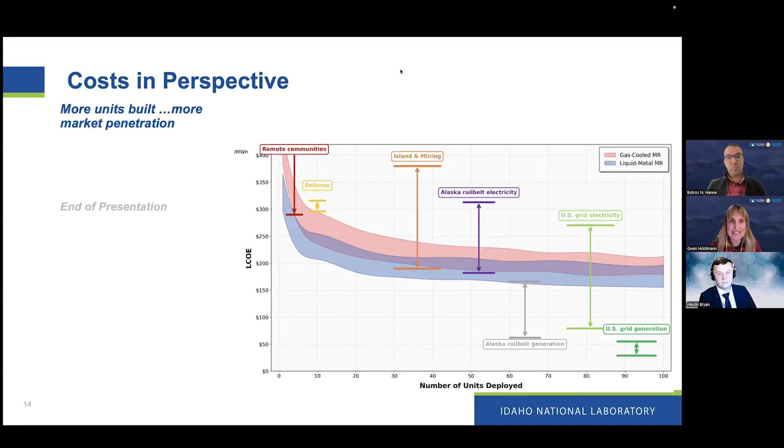All right, excellent. I'll just, Botros, since you are finishing up, just a couple of super quick questions. Did you include decommissioning costs in your estimates? Where did you get the numbers from? Where were you basing these numbers off of?

Yeah, that's great. So obviously we don't know the decommissioning cost of microreactors, but there are some models that were based on larger reactors. So we used this model to estimate the decommissioning cost.

Okay, and the same, like, what reactor lifetimes were you assuming for these? Right, so I mean, reactor life, we assumed, I think, like 40 or 60 years. Oh, okay, okay, so pretty significant. Yeah, okay, cool, all right.

Well, I'm kind of curious. My first question to both of you would be for Alaska in general, but let's just say the Railbelt, because Hayden was working there. Let's start with the Railbelt anyway, we can move on to other use applications. What do you guys see as the next step? If there's interest from the utilities, what should we be doing up in Alaska while we're waiting for these to become a little closer to full commercialization?